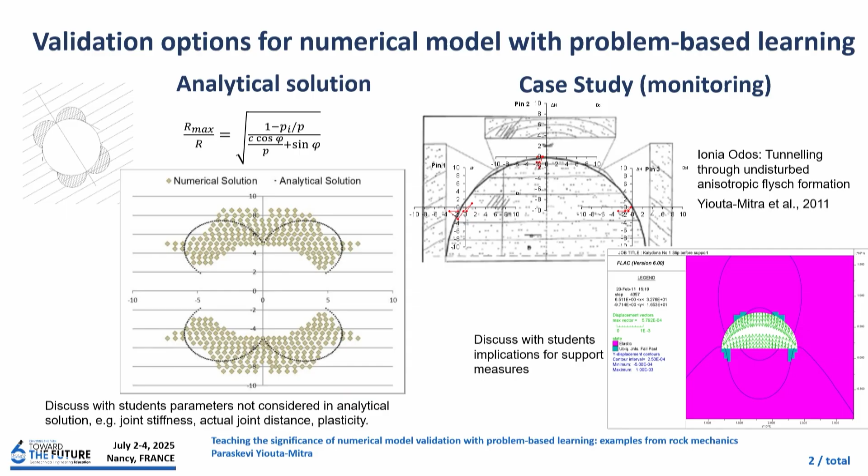The left side is validating your model with an analytical solution, and the right side is validating your case. Of course, this is for teaching with a case study, but if you're the engineer working on the case study, what do you validate your model with?

But anyway, in the teaching context, we have two ways of validating. I guess in the industry context, we have only one way of validating. So you should go and read the paper of my colleague from NTUA.

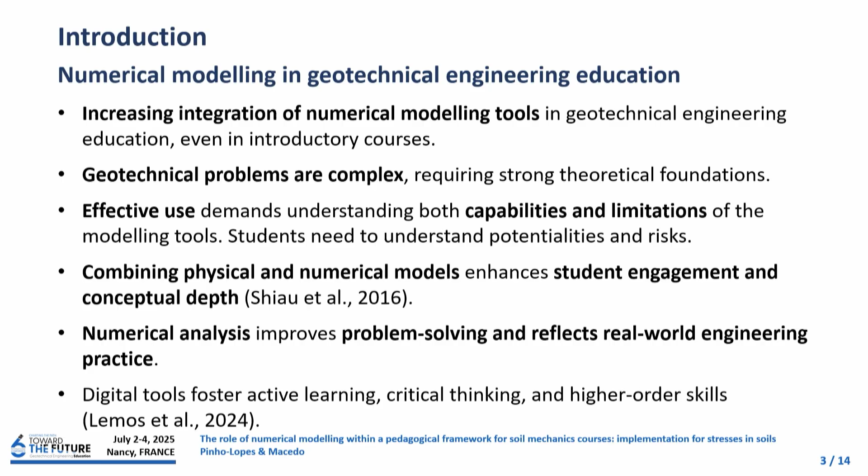While they develop the technical skills that are so important for their future, we know from experience and from the literature that numerical modeling is important, and it's important to introduce these tools even in introductory courses. But geotechnical problems are complex because they require strong theoretical foundations. It's important to first calibrate and validate the models, because they could give what we want, basically. So their effective use demands understanding of the capabilities and limitations of the tools.

Students need to understand the potentialities of the tools and also their risks, like we saw in the talks this morning. So it's also important to show and demonstrate the physical concepts.

Combining physical and numerical models is important because it enhances students' engagement and promotes conceptual depth of those concepts. Numerical analysis improves problem solving and reflects real-world engineering practice. Digital tools foster active learning, critical thinking, and high-order skills that we want to promote in our students.

The context: these are the two programs that we have at the University of Aveiro. In the undergraduate degree, we have basically two courses about soil mechanics—in the first year, a course about engineering geology, and in the master's, a course about foundations and retaining structures.

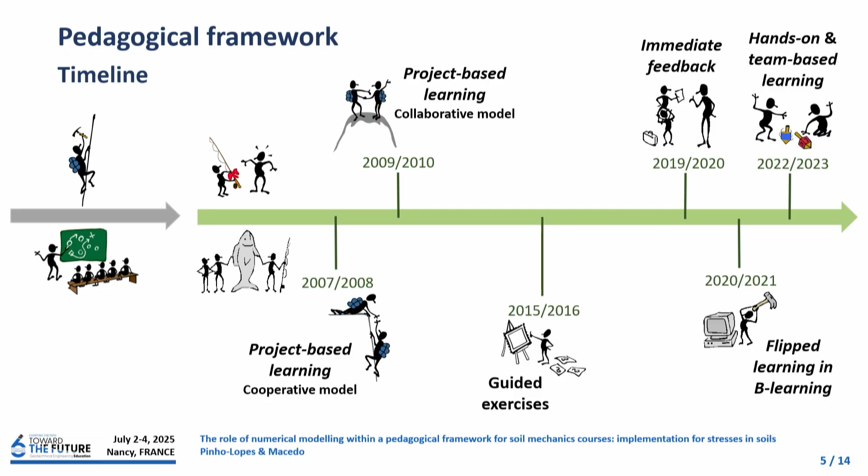We started this path in 2007, 2008, when the Bologna process triggered all the change, and we started to create a pedagogical framework. First implementing project-based learning in a model with a cooperative approach, then we evolved to a collaborative approach. Then we started to create new layers of active learning strategies like guided exercises, immediate feedback, flipped learning during the pandemic, and finally hands-on and team-based learning combined, so experiential learning was also implemented.

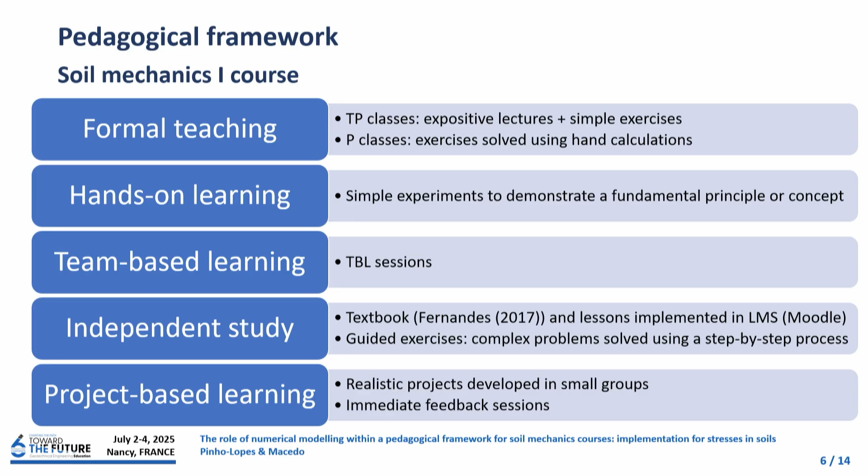So this framework is now stabilized, so we have all these active learning strategies combined. Of course, we have formal teaching, theoretical practical classes with expositive lectures where we do also simple exercises. We have practical classes where the students solve exercises.

And then we have other layers of active learning strategies like hands-on learning where they perform simple experiments. They also do team-based learning, so in some classes we implement this strategy where they collaborate and work in teams to solve quizzes. And then the final fundamental element is the feedback that we provide in big groups. It's important to have independent studies.

So we have, of course, the book of Professor Matos Fernandes that we adopt as a reference guide. We also prepare lessons implemented in our learning management system, Moodle, where the students can hear some of the lessons that we prepared during the pandemic.

And finally, the project-based learning where we implemented the numerical models. So they are challenged to solve realistic projects developed in teams, and in the end they receive immediate feedback.

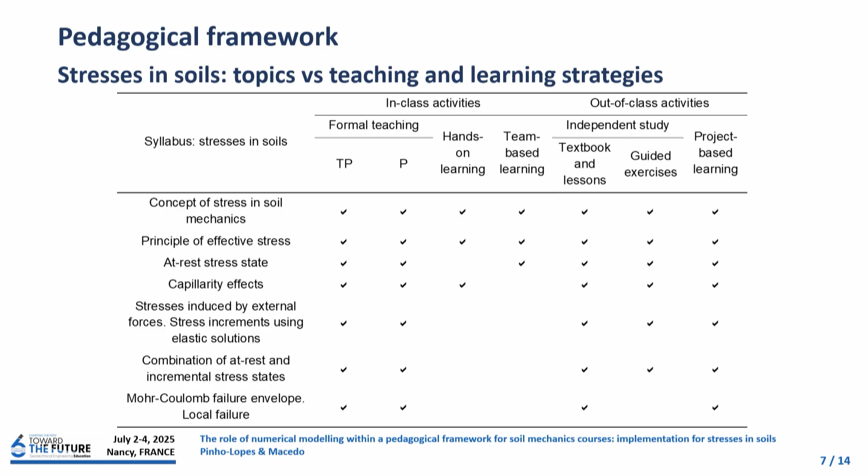So we pick up the topic of stresses in soils, and here we can see how the different strategies are combined and the topics that are studied in this chapter of the syllabus. For each of the topics, we have different strategies where we try to give the students different ways to learn the concepts.

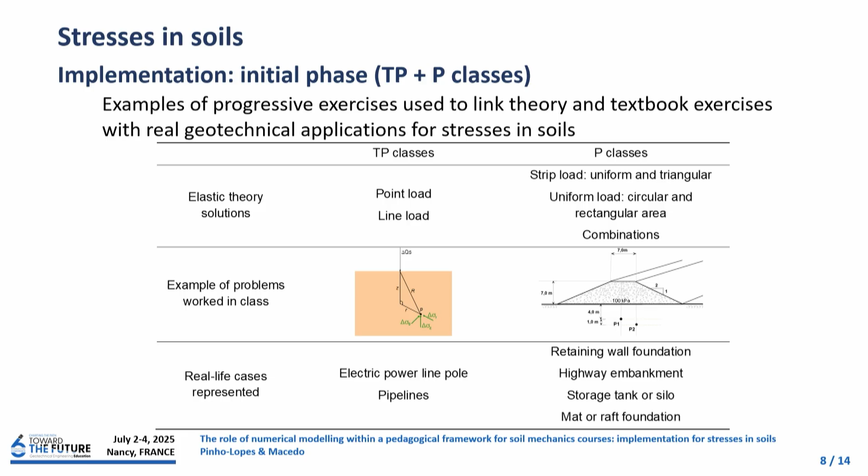For example, we start with the theoretical and practical classes, and there we solve the more simple exercises, then we evolve to more complex ones in practical classes, always giving real-life cases to illustrate how they have application to reality.

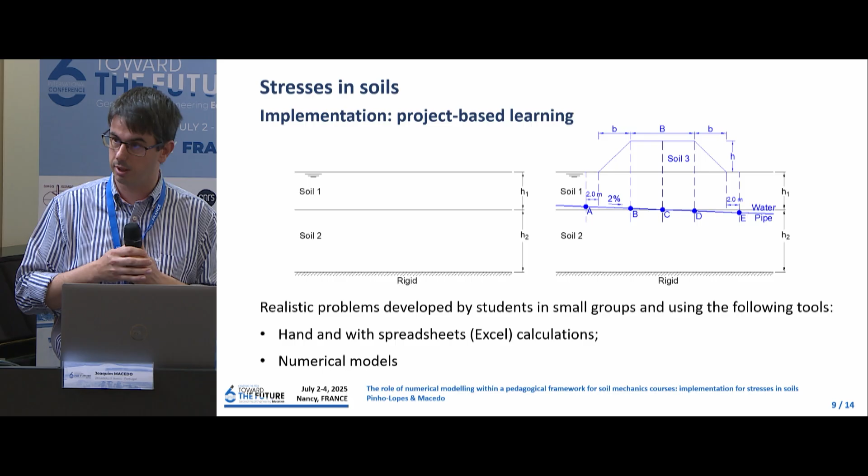In the project-based learning, we usually challenge the students with more complex exercises, where we try to give them two different approaches. One approach where they solve the exercises by hand and using Excel spreadsheets for calculations, and we also introduce numerical models. I'll show you here some results from the models that the students developed.

We also use GeoStudio. Usually they create simple models because that is the idea — they are undergraduate students. We want to start the use of these models, but we also want to make the students aware of the potentialities, but also the risks, and to dismantle some misconceptions that they have. And also to show them, for example, how boundary conditions can influence the results.

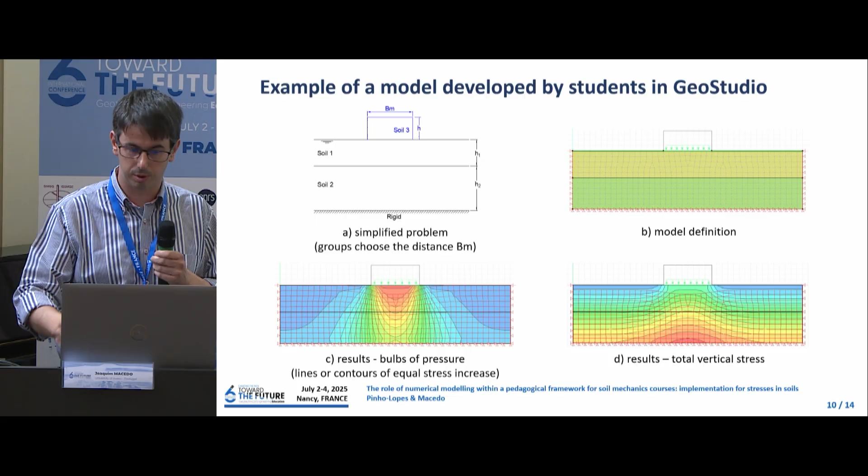So this is an example of a model that the students developed, and here an example of the analysis that they performed. What is basically the big idea? We challenged students to solve the problem, but most important, to compare the results.

So they compared the results obtained by the two ways — calculations and spreadsheets, and also the numerical models. They perform critical analysis, so the idea is to compare the results obtained by the two ways and discuss them. And for that, the feedback sessions are fundamental.

So they discuss the results with us in sessions with one group only. Of course, this is only feasible because we have a small number of students. And in the end, what we want to promote is the development of competences like deep learning, critical thinking, and also digital literacy, because they are using digital tools.

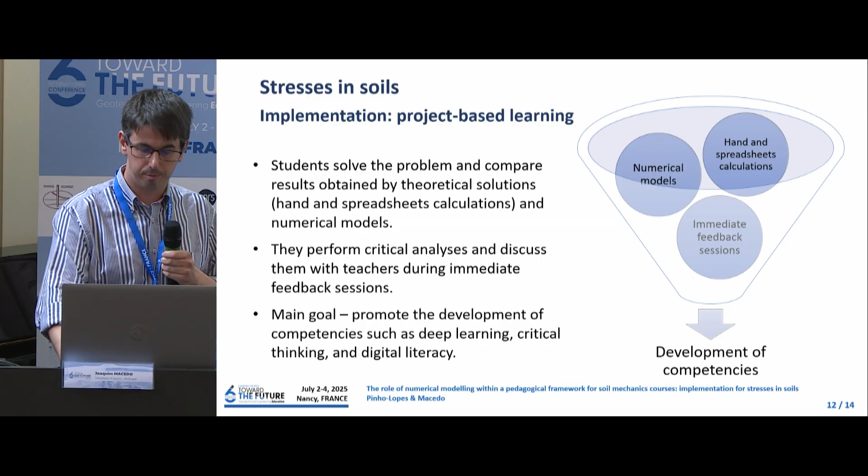So, to respect my time, some final remarks. We implemented numerical modeling successfully in an undergraduate soil mechanics course. We think that all this pedagogical framework fosters active, personalized learning, and in our opinion it's fundamental because the students are all different.

They need to follow different approaches. Some learn better with one approach, others with another. So the combination of all these different approaches is important for their development. Skill development is also important. Applied examples support understanding of complex soil mechanics concepts — this is fundamental to show them how things work.

It's important also to encourage autonomy, to promote deep learning, critical thinking, and digital literacy. We think this pedagogical framework contributes to that and creates an engaging and supportive environment for academic and professional growth, which is fundamental for their future lives. Thank you very much.

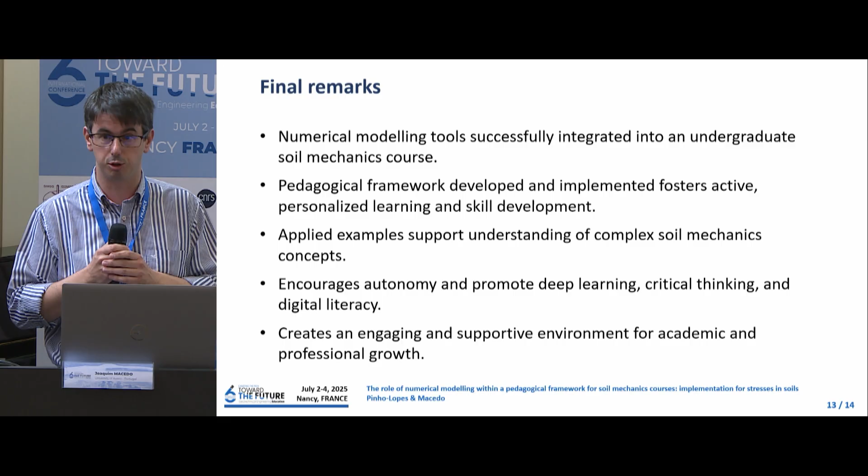Marina: I think it's great that your students have the opportunity to be exposed to numerical modeling in the first course. Do you have later an elective course dedicated to numerical modeling, and if yes, do you teach it, or if someone else teaches it, do you collaborate with them? It's a good question. In our study program, yes, we have one elective course, but it's not working because usually the students don't choose the course.

Now that you have numerical modeling in the introductory course, maybe you'll see a change in this elective. Yeah, we hope so. We wish to see that difference.

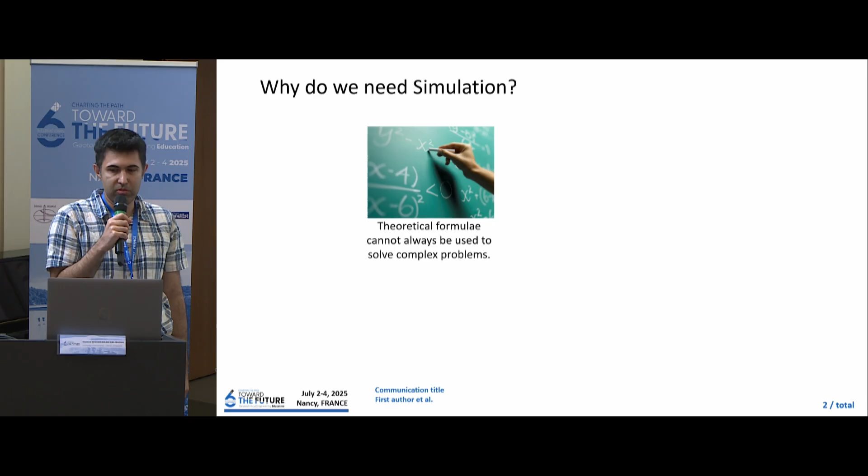Also, there are a lot of physical experiments that we do in soil mechanics. Physical experiments are quite good for student learning, but sometimes they take time to do. Also, in some universities it's expensive. You remember during COVID time, you couldn't get access to the laboratory. So those are the sort of problems we have when we go for a physical experiment. Personally, I believe we need this, and we need to do it along with numerical modeling.

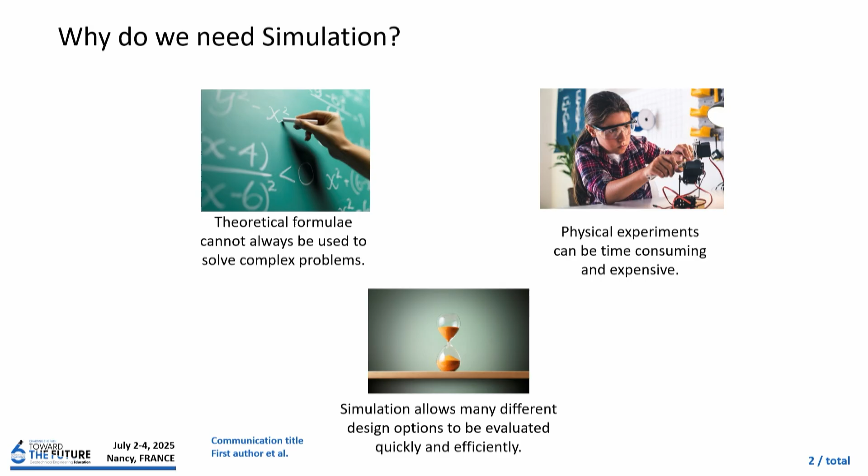And finally, simulation allows many different design options—you cannot instantly change the design by using a physical experiment, but numerical tools give you the opportunity to change parameters and quickly see the result. All of that is embedded in simulation and numerical modeling. Another aspect important for today's presentation, since we are all in geotechnical engineering, is why we need digital tools in geotechnical engineering.

First of all, students will learn many topics based on problem-solving skills. So we need to define the problems, and then they go for finding some solutions. Also, we need to teach students some real civil engineering projects. What we teach usually in civil engineering was some simple task. We give them some good view of simple task.

But in my class, for example, a student asked me a lot of questions about something that I didn't teach them. And I say, okay, forget about this, it's a real situation, you will learn it later. But that later never happens because they need to learn it in the industry, they need to make a lot of mistakes in industry to learn. So giving them some opportunity to try and go finding some errors during the class is important for us.

Also, if we teach students some numerical modeling, and that numerical modeling used by many industry, this means that students have some good equipment when they go to the job market. So when you go to job markets, they said, oh, do you know this software? Can you work with other software like this? And most of the kids, students say, no, we will learn it in the industry because university is usually some theoretical background.

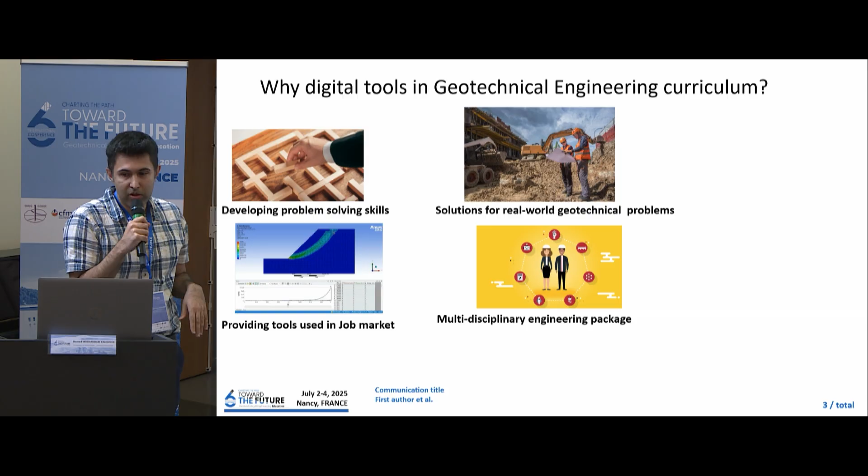And finally, if students learn some software which is multidisciplinary, they have some common language to speak with other people. So if you teach them some software that's used by electrical engineering, mechanical engineering, so they can communicate, they can get some drawing from electrical engineering, they can work on that, and they can implement. So picking a good software is important in my view, and we try to pick a good software for our soil mechanics class. What we did was a case study.

I use a software, I will tell you what software, for modeling of the water flow in the soil. So modeling of the water flow in the soil is a part of geotechnical engineering, and it's part of the soil mechanics. Actually, it's a kind of three-dimensional problem. It's a complex flow in the soil, and it needs some numerical solution.

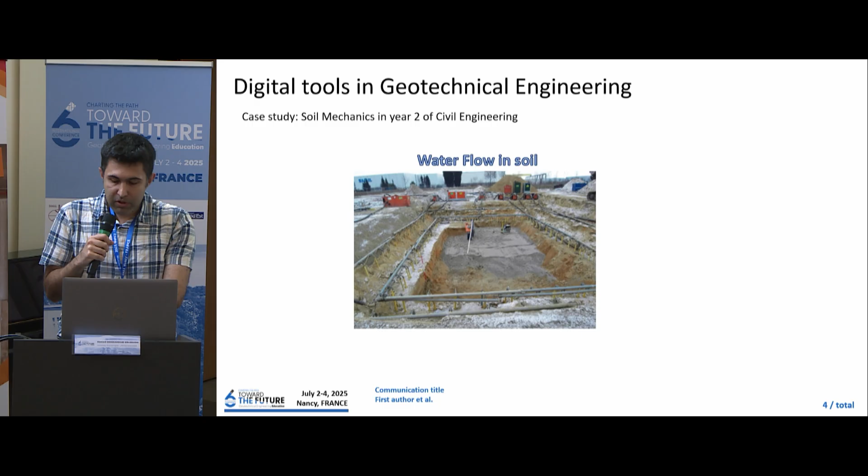Before using a proper numerical software, I'm teaching this course based on some spreadsheet. So students go to the laboratory, it's kind of the computer laboratory. They go for some hand calculation like this, graphical solution. And in the laboratories, they go for some spreadsheet software like Excel for modeling of the flow.

So we did it before any intervention that we had. In 2023, we had that implementation. We had that flow of the water. Students work on the Excel file, but a lot of complaints coming to me. The complaint was, okay, the spreadsheet was nice, but when I make a mistake somewhere, I didn't know what's wrong with my problem.

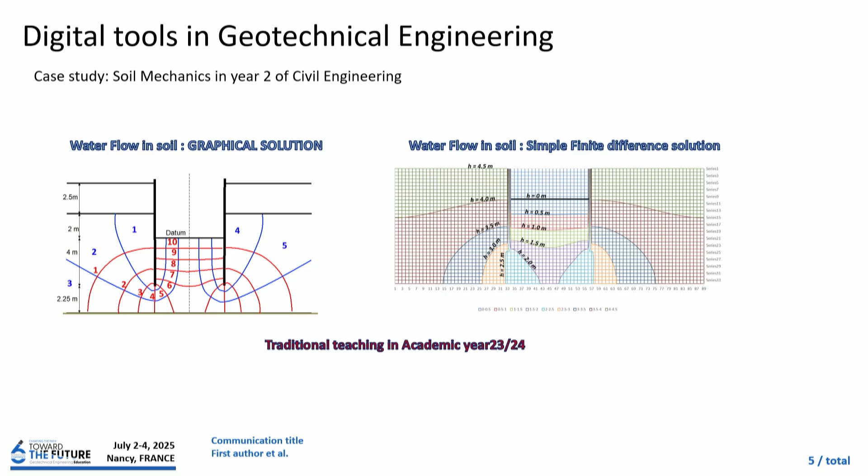Another complaint was, okay, this is for two-dimensional problem. What can I do when I go for three-dimensional problem? So those sort of complaints coming from the students. They learn Excel file quickly because it's easy, but they understand that, okay, this is not enough. For real situation, that's not enough. And I agree with them, this is not enough.

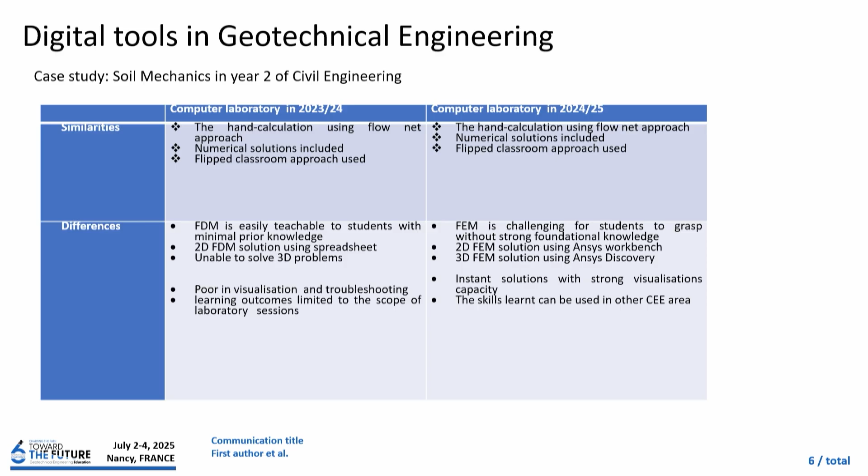So I go for a numerical solution in new year, 2024. So instead of using the finite difference method based on Excel file, we use a proper finite element software. I will give you the name of that, but the key point here is we still have some hand calculation in both years, but we can go for two-dimensional and three-dimensional problems when we are using a proper engineering software. The software that I'm using was ANSYS.

So in Strathclyde, we become partner with ANSYS software. It's not that famous in geotechnical engineering area, so it's used in mechanical engineering. But the good point here is it's a general software, it can be used by other engineering as well. And a skill students learn in ANSYS, they can use it later, and they can communicate it with other people as well.

A good point about ANSYS is the user interface is very good, so you don't need to teach students too much about the finite element. Also, it has the advantage of instant simulation, many finite element software doesn't have. And it's good for teaching some basic concept to students who doesn't know the finite element. So I found it very relevant for my class. It has a fast visualization, and as I mentioned, it's kind of the multidisciplinary package.

The key point about the ANSYS was it's supporting the real-time simulation. Real-time simulation is important because we are dealing with students. Students don't have background knowledge about the finite element method.

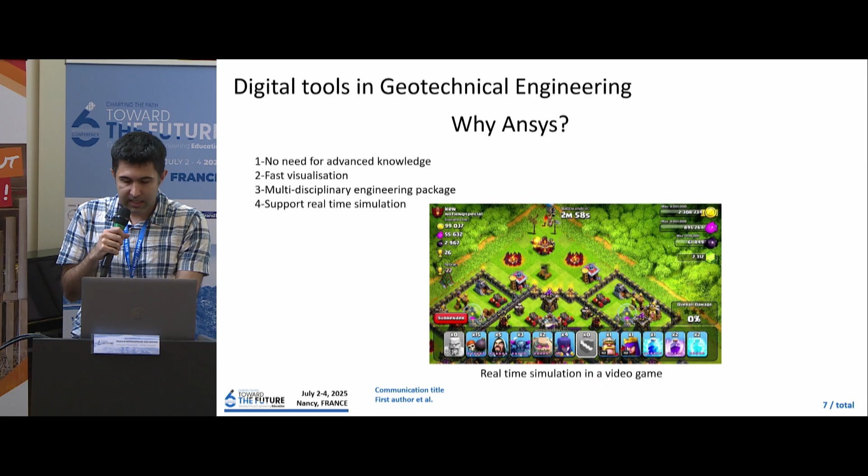So I use ANSYS for my class and for my laboratory. I changed that laboratory based on ANSYS. So instead of using spreadsheet software, I'm using ANSYS.

Students watch a lot of videos in advance, so we created good quality professional videos at Strathclyde. In the class, which was the laboratories, they went there and tried to use ANSYS in the presence of tutors. So they work on their actual projects.

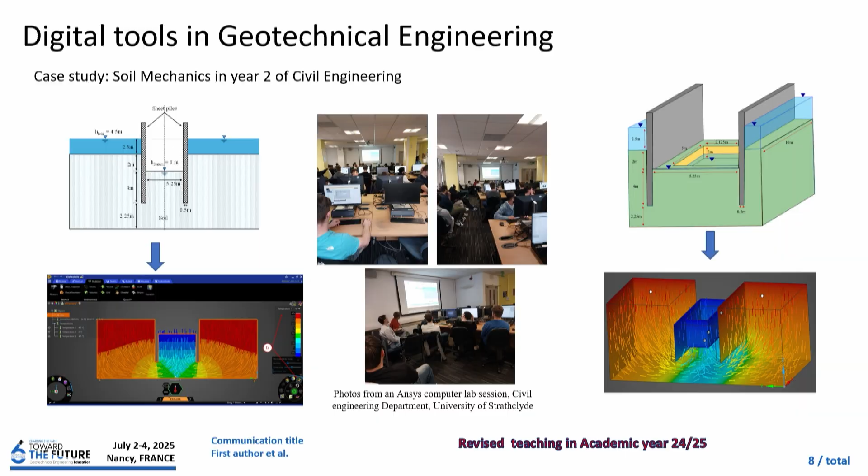A good point here was we had an extra activity for them based on three-dimensional flow. In three-dimensional flows, they cannot use any spreadsheet, but what they did in the laboratory was go for three-dimensional problems. Although this task was optional, many students tried to attempt it. That's a good point for me, because they go for some solution of the real situation.

In terms of students' acceptance, we performed a survey, one done by the university and one done by myself. So I did two types of survey, one in 2023 and one for the current year.

The students say that, okay, you did some numerical simulation, that's fantastic, but we still need some physical laboratory. So that's the students' opinion about my implementations. They said, okay, we need this, numerical modeling is good, but we need to do something else. We need to keep the physical modeling as well.

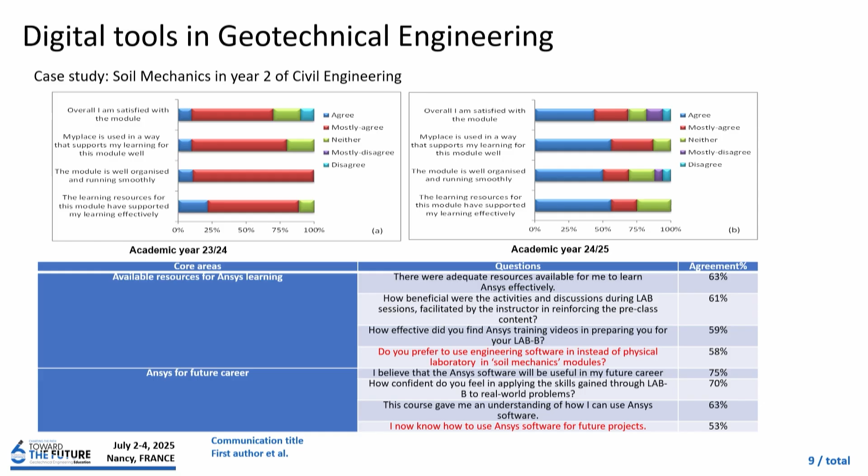Also, they found ANSYS quite useful, but they said that the training we provided was not enough. So we put some videos, but we didn't prepare a student from zero knowledge. We just prepared them for that laboratory, okay? What you need to do is prepare a student from year one, because they need to see and work with some software, and then gradually we can move on to year two, year three, etc.

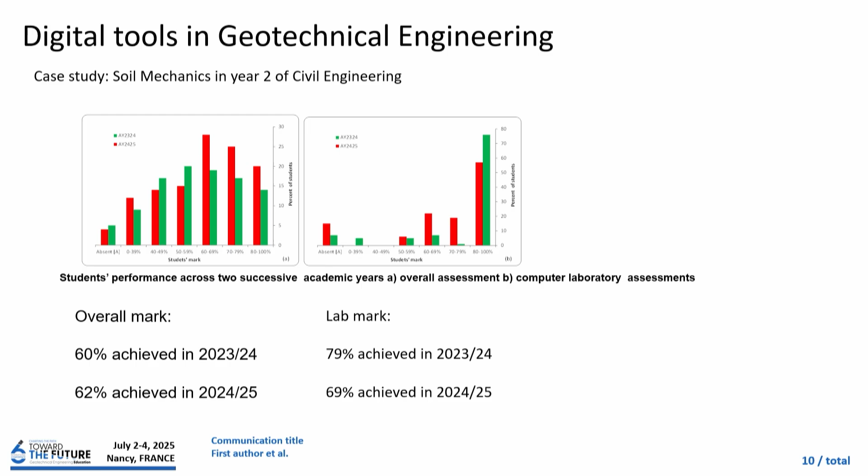I compared their performance in two years, 2023 and 2025. The average of the mark was the same between these two years, but in the new revised laboratory sessions, I got a lower mark. This means that, okay, students like ANSYS, they like numerical simulation, but their mark is low.

I'm thinking about the reason for that. I found some clue for that, and maybe it's because we need proper reporting when we go for the numerical simulation. The students submit some work, but it doesn't make sense. They didn't put legends, they didn't put anything, because they don't know about this.

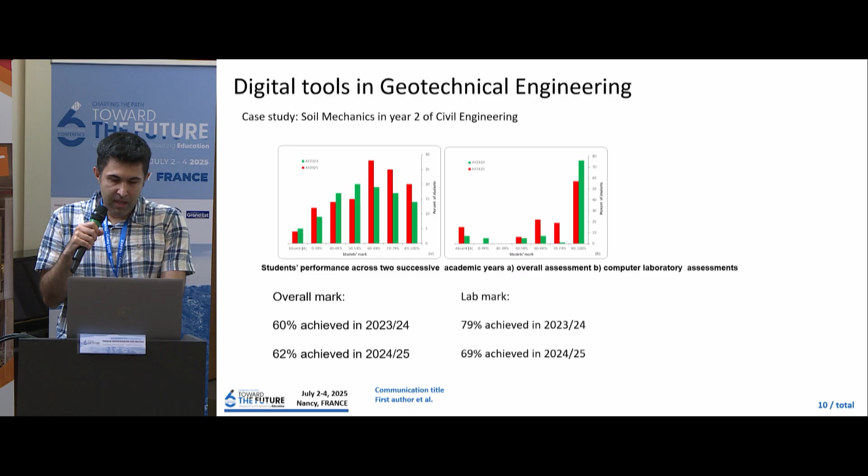So I'm thinking to improve this in my next teaching round. For this case study, I tried to contact ANSYS, and we put that case study on the ANSYS website. This gives all educators the opportunity to go and use this strategy for their class. It's an open source area, you can download that. All the steps are here.

Our plan is to go further than the soil mechanics class, because soil mechanics is the start of geotechnical engineering. We need to prepare students for some advanced classes, like advanced foundation, geotechnical engineering, etc. Okay? So our plan is to produce some content in year 3, year 4, etc.

Out of time, yeah? Okay. So I'm reaching the end, sorry for that.

So we get good satisfaction from students by the new intervention that we did. Students found the ANSYS simulation quite useful for their future job career. Also, they found that the physical laboratory, we should keep it. So we cannot put aside the laboratory, that's not a good strategy.

What I believe is it's good to put some strategy in year 1. Soil mechanics for us is year 2. I'm thinking to put some numerical simulation, some basics of the numerical simulation, in year 1 as well.

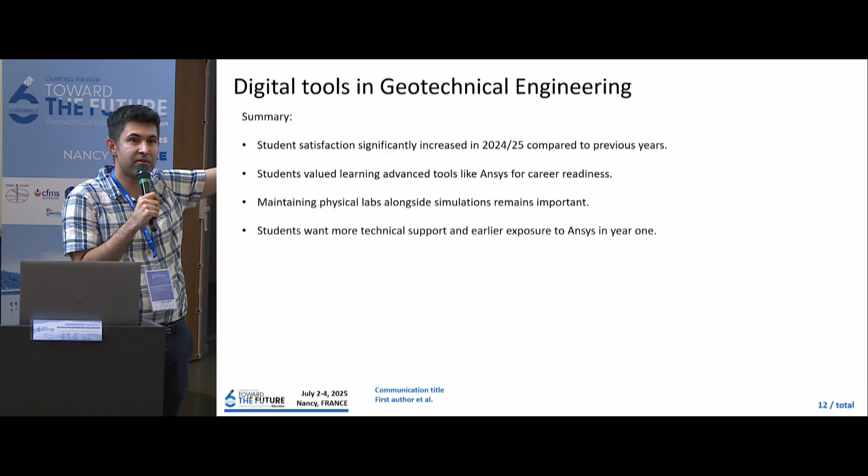Short answer is no, we don't have it. We have something in year 3, but this is year 2 students. They don't know about numerical modeling, finite element modeling at all. But even in year 3, it's only numerical modeling in general, not finite element. What we want to put is something for the master degree, some elective things for master degree. But anyway, I don't think you should expect students to learn finite element in year 1, year 2.

They can see, they can play, they can use it in a way that they are playing video games. So that's my strategy. But they need to know the theories of, for example, flow of water in the soil. So we cannot put it aside. We need a benchmark comparing the numerical solution with that. So we cannot put it aside, in my view.

Can I just reinforce the method? We are not teaching numerical methods. We are using the numerical tool as a virtual laboratory, and we are not downgrading the numerical skill. He is doing the job because he's a numerical person, not me. So the one preparing the tool to be used as a video game by the student has numerical skill and numerical expertise. But that's a virtual laboratory, it's not numerical method. Although we are facilitating later on the approach to numerical method. That is another story.

Thank you, Alessandro. Any other question or comment? No? So we'll move on. Thank you. Thank you, Ahmed.

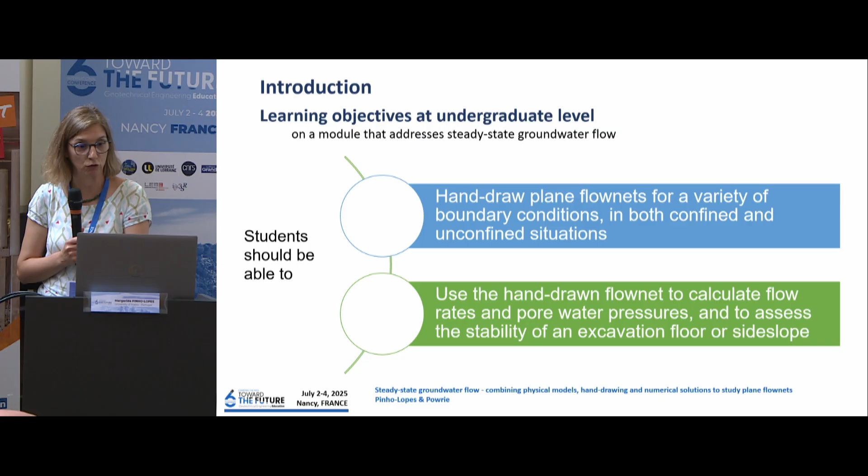Having said this, we need to make sure that they really understand the underlying concepts. So what we've been trying to do is promote deep learning.

For that, we have drawn from our knowledge of different areas: on one hand, the content that we want to teach, but also using pedagogical research literature to inform our teaching. The paper includes some literature review on how to promote effective and deep learning and some strategies that should be used for that, and I won't go into those details now.

We also need to address different learning styles. Not everybody is keen on sitting in a room listening to someone talking for hours. So using a variety of resources and formats can be a way of reaching different students at different moments. We also aim to promote visual literacy, so students are able to communicate but also interpret data that is conveyed in a visual format.

For this, what we have been using, and I think this will resonate with Nicola's talk, is a combination of strategies. We've been using physical models to illustrate the phenomena to students. They then move on to hand-drawing flow nets, and then we use numerical tools, as Francesco said, we're just users, to support all of this, with two variations that I'll explain later on.

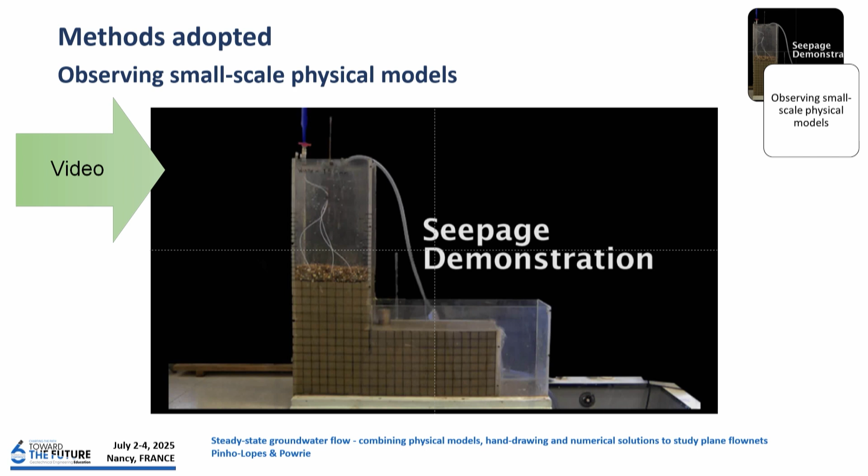In terms of physical models, we've decided to use a video instead of going into the lab because it's simpler, and we can replay the video, pause it. Students can access the video on their own, so they can use it as an element of study to support their work when they're solving exercises, for example.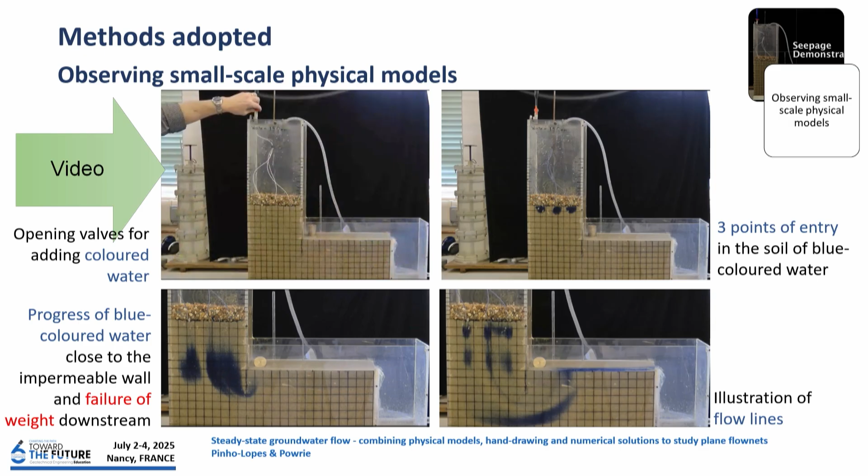In class, I stop the video, I explain, I go back, and I point out different features of the problem.

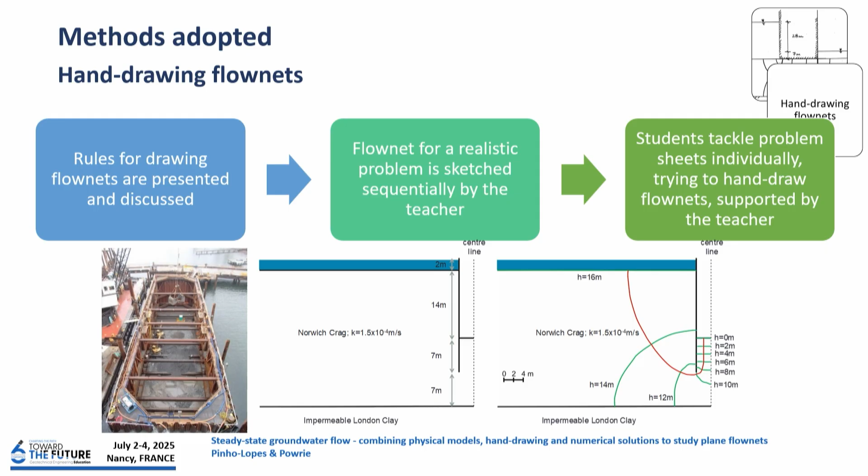Afterwards, and of course we have formal teaching to explain the theory behind it, we move on to the hand-drawing part. We start by presenting the rules for drawing flow nets, graphically solving a simpler 2D problem, and we discuss them in class. Then we build slowly, explaining how all the steps link to the rules, a realistic problem similar to the one in the video, so we can relate to that example.

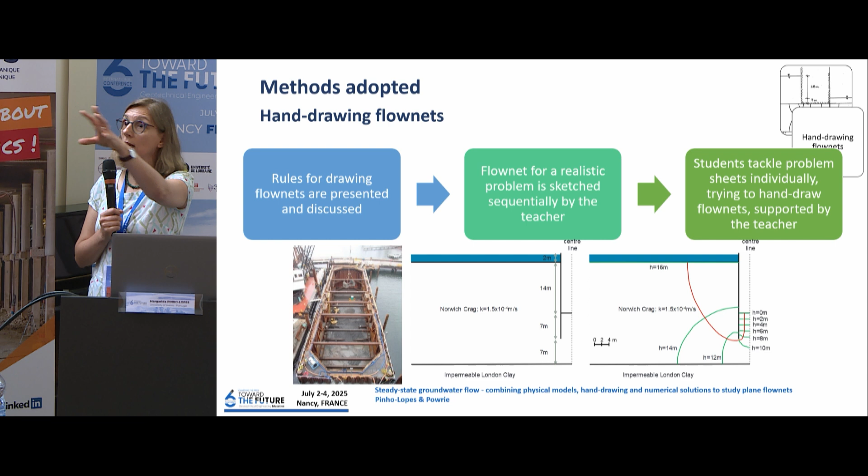Then afterwards, students tackle problems, so they have to hand draw their flow nets in class, even in an environment like this, so they do it on their own, and I walk around helping them to move on. Of course, this is a daunting task. They don't know where to start. So we need to support this in some way.

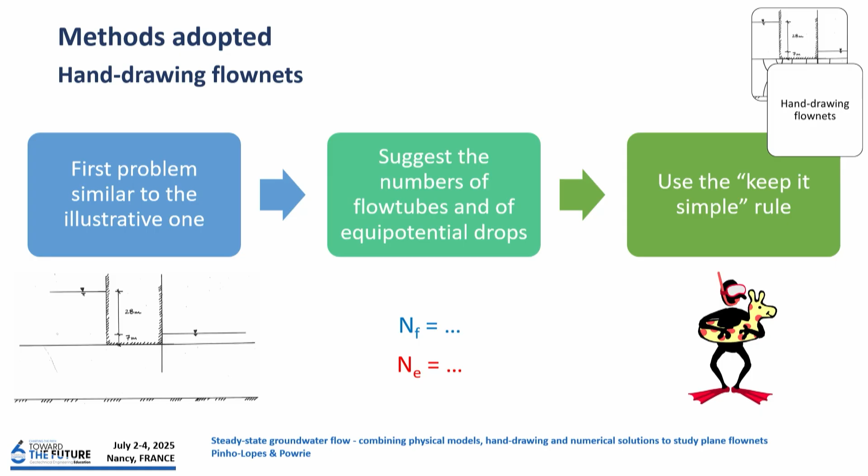So what we do is we choose a first problem that is quite similar to the one we used to illustrate the topic. We often define the number of flow tubes or equipotential drops that they need to get in their drawings, so they have some reference, and we, as Nicolas was saying, reinforce the idea that they should keep it simple, to make their life easier.

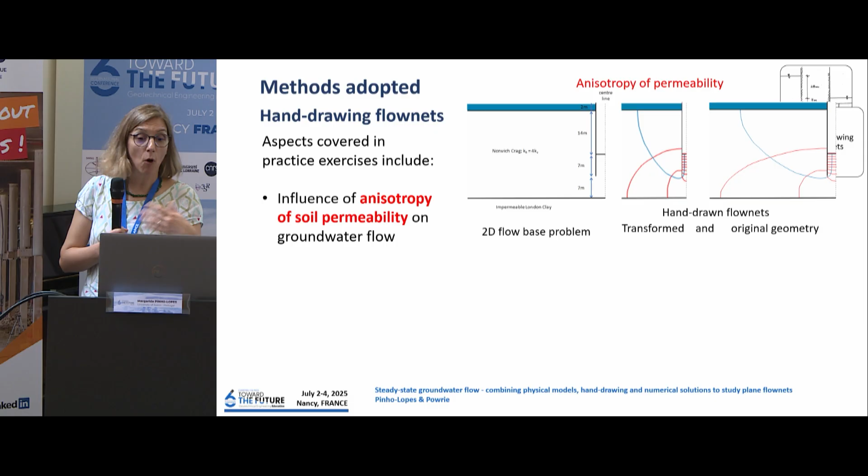This, of course, evolves, and the flow nets that they need to draw become more complicated, and they include, for example, anisotropy of permeability as well, and both confined and unconfined flow nets. But I won't go into those issues.

So then we also use, as I've said before, numerical tools to generate these flow nets, and we do it in two different ways. The first way, done at Southampton, and I'm still doing it, is we use the numerical tools to generate flow nets that we discuss with students, that we show to students. The second approach, done together with the first, we've been developing at University of Aveiro under the project-based learning that Joaquim presented before, where students also use the software to generate flow nets.

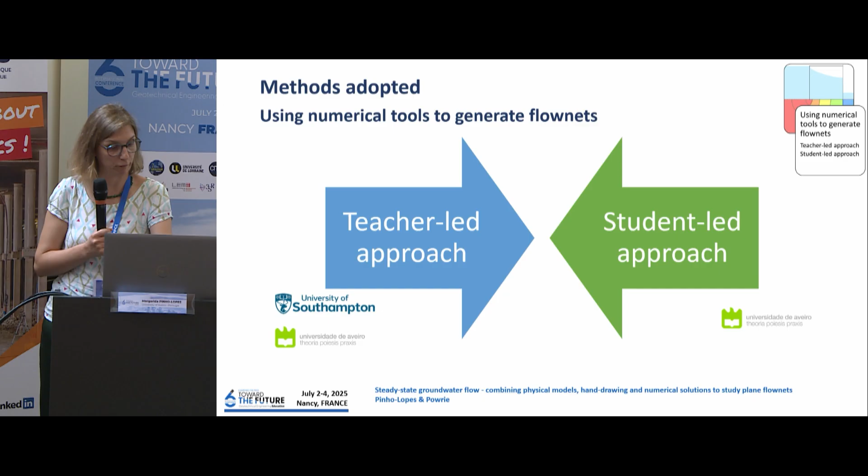Under the teacher-led approach, we want to produce educational material, and that includes generating numerical solutions for the problems students are tackling in class, so they have a reference to compare their hand-drawn flow nets with. But we also use them to promote in-class discussion, something we've been discussing earlier today. What's the impact of boundary conditions on the solution? What if we change the soil permeability, the head loss, the layered profiles, and so on? Whatever we want to discuss with students, we can.

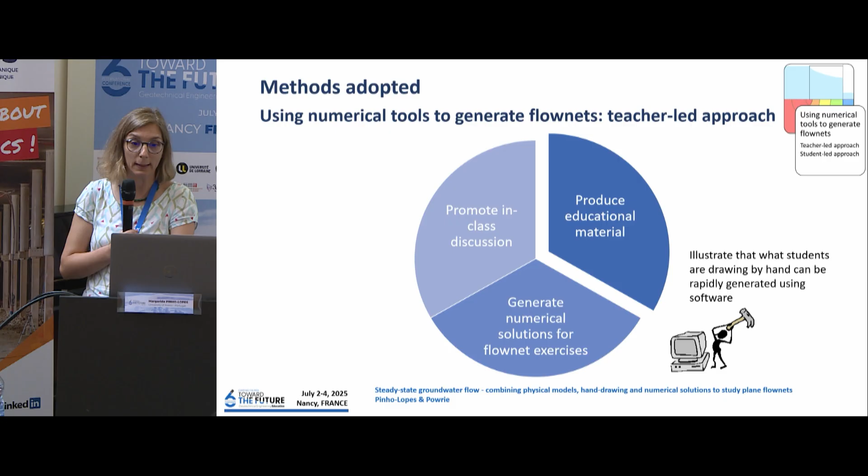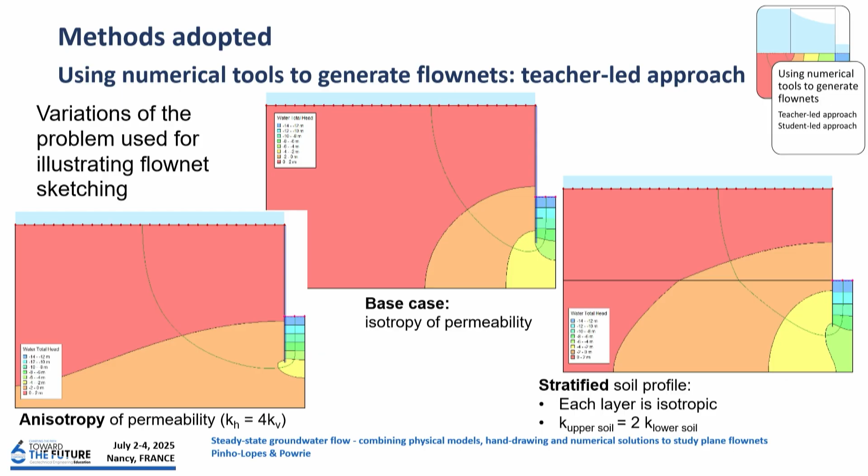And again, just some examples used in class of flow nets generated for anisotropy of permeability of one soil, stratified soil profile, so we can discuss the influence of the difference in permeability of the two soils, for example, in the solution. These are just materials we've generated to support teaching, and some of these have limitations, which we use for in-class discussion as well.

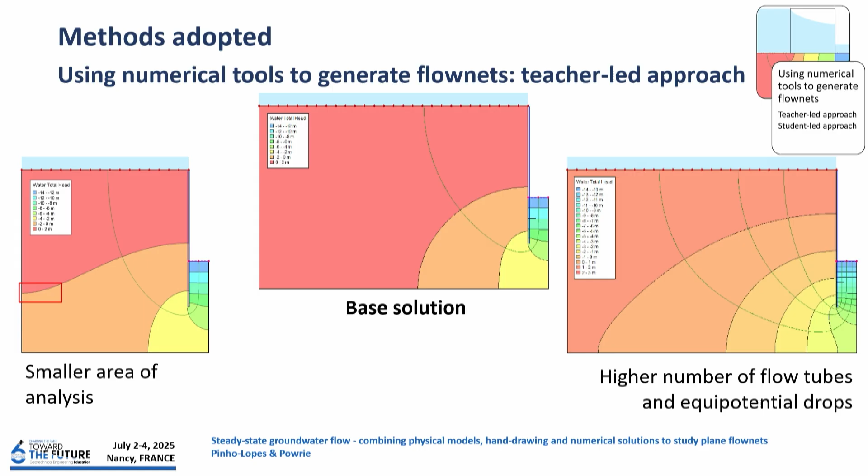For example, as you can see here on the left-hand side, the boundary is too close to the curtain, and that influences the flow net. So all of this is discussed with students. In class, I ask them to try and explain the differences so they become aware of those.

And of course, we generate different versions of the flow nets. I think I haven't mentioned which tool I use. I use GeoStudio, as Francesca mentioned, because I think it's quite user-friendly for us and for students to use.

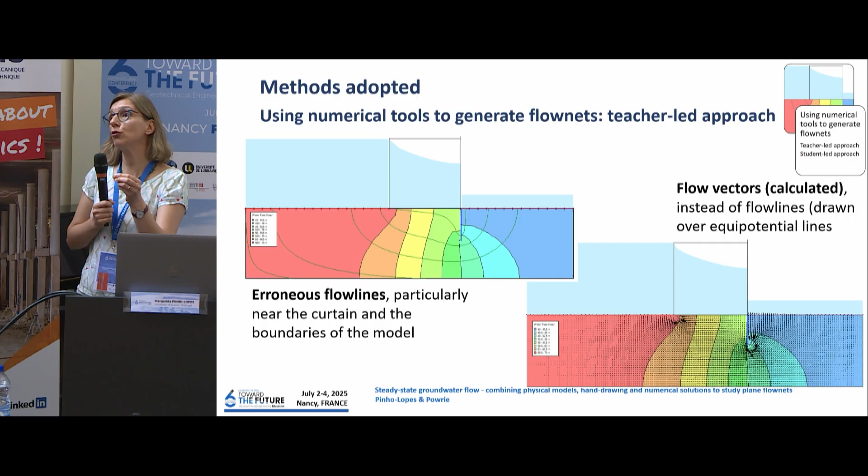But GeoStudio doesn't calculate flow lines, it calculates flow vectors. So those flow lines are drawn on top of the equipotential lines, and that can create problems. We discuss that in class, and I often do exercises of the type spot the error, okay? This is an example of that. So we point out that flow vectors need to be looked at when using GeoStudio rather than flow lines.

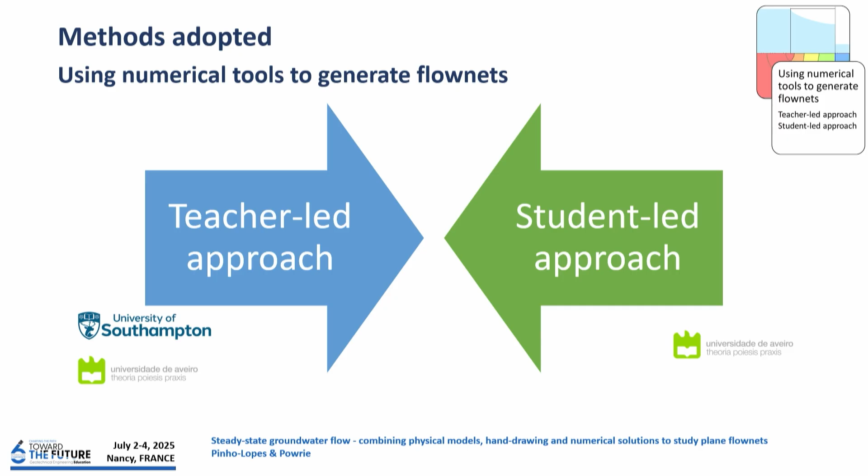So for the student-led approach, as I've said, and I have just a little bit of time, we ask students in Aveiro to tackle team projects. These team projects are different depending on the topic we are referring to, but they may involve lab work, hand calculations or with spreadsheets and using software.

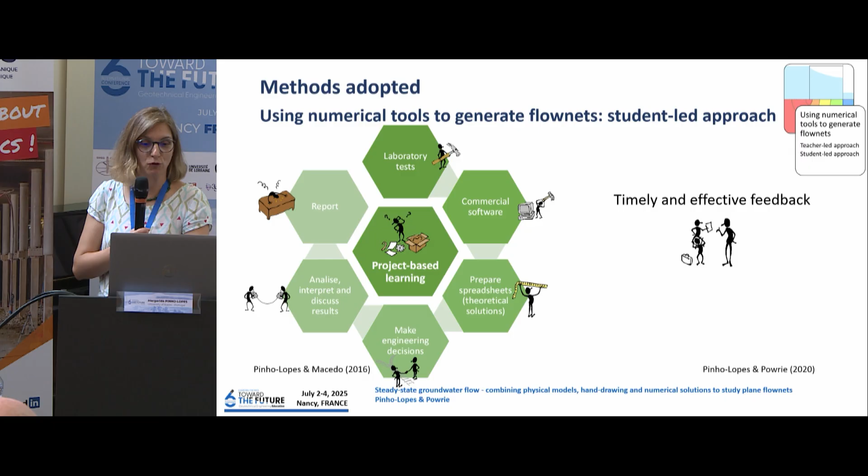But the key part, as I've said before, is at the end to discuss the outputs with the students, to correct mistakes or demystify misconceptions. All of this work, of course, has to be adequately supported, so we use resources from the software provider.

But we've also produced video tutorials fiddling with GeoStudio, generating the problem in different ways, changing the geometry, the boundary conditions, whatever you want, for students to be aware of the impact on the results. And about the meshing in GeoStudio, we can only change the size of the element, and that is discussed as well with students.

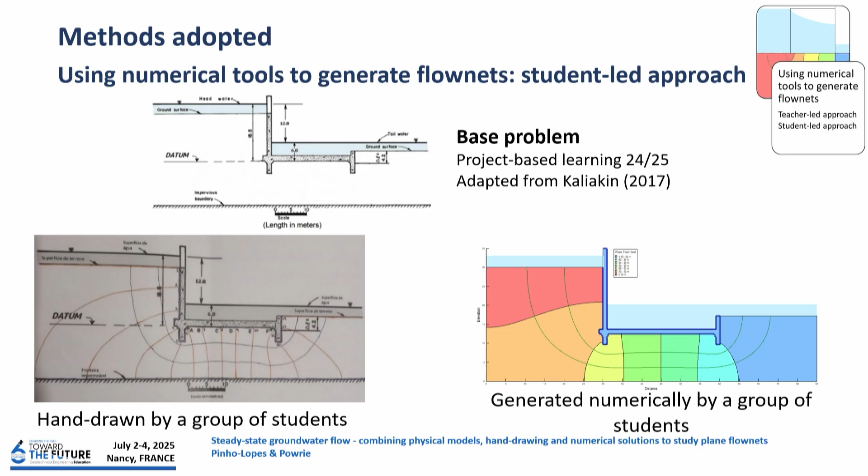So these are just some examples of students' output, hand-drawn and generated with the software from this academic year. And I'm out of time. I would just say that...

We've tried to use different strategies, and we think this is working. I think we are able to engage students, but at the same time, we foster critical thinking. And I think that's the key part of it.

So I would say we can use numerical tools or have students with no background in finite element methods using numerical tools as long as we scaffold that process and support them into their learning. And I had some more things, but I'll go over that.

So as a conclusion, William and I recommend using this variety of tools to support learning. Thank you.

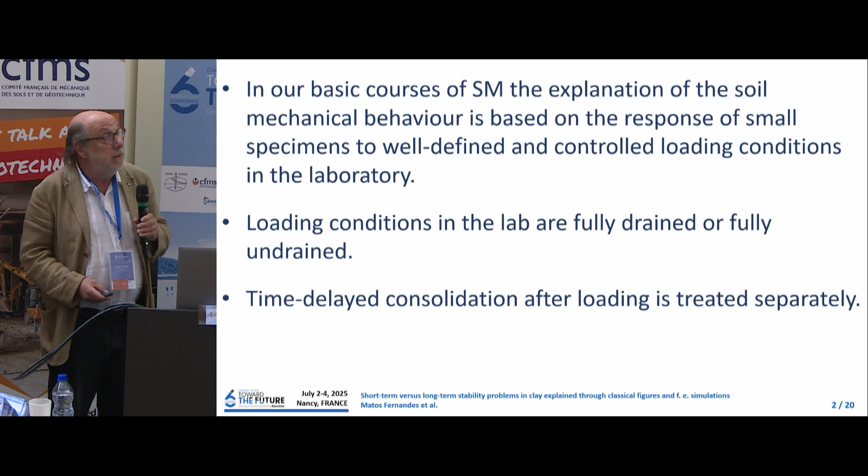In our basic courses of soil mechanics, the explanation of soil mechanical behavior is based on the response of small specimens to well-defined and controlled loading conditions in the laboratory. The loading conditions in the lab are fully drained or fully undrained, and the time-delayed consolidation after loading is treated separately.

For those reasons, a closure class presenting real field loading examples may be highly formative - I'm speaking about the last class of the course. For that closure class, the paper proposes the discussion of two geotechnical works: the construction of an embankment on soft clay and the excavation of a sloped cut in clay.

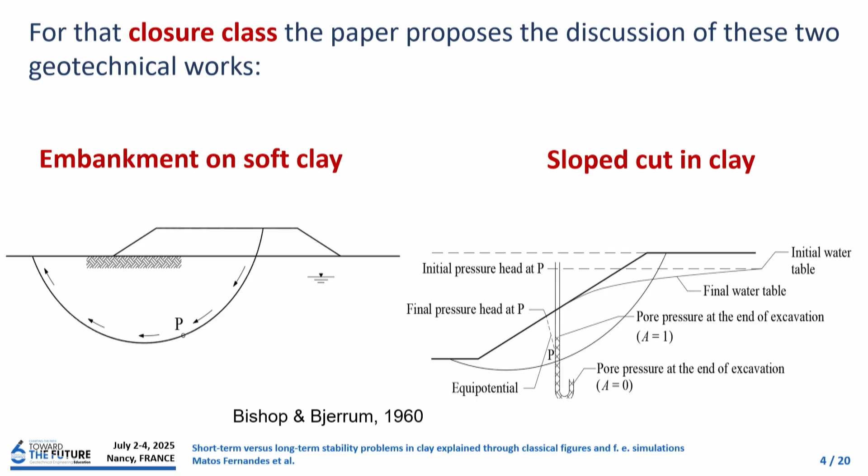These two very common and very relevant geotechnical works are splendidly explained in two classical figures developed by Bishop and Bjerrum, which you probably know very well. This is the figure for embankment construction. We see the embankment and the potential rotational failure.

The second graph shows the rising of the height of the embankment over time and the rising of the average shear stress at a generic point P of the foundation ground. The increment of surface loading leads to a rise in pore pressure. It induces an excess pore pressure over time that reaches its maximum at the end of construction, and after that we have a consolidation process where the pore pressure returns to equilibrium.

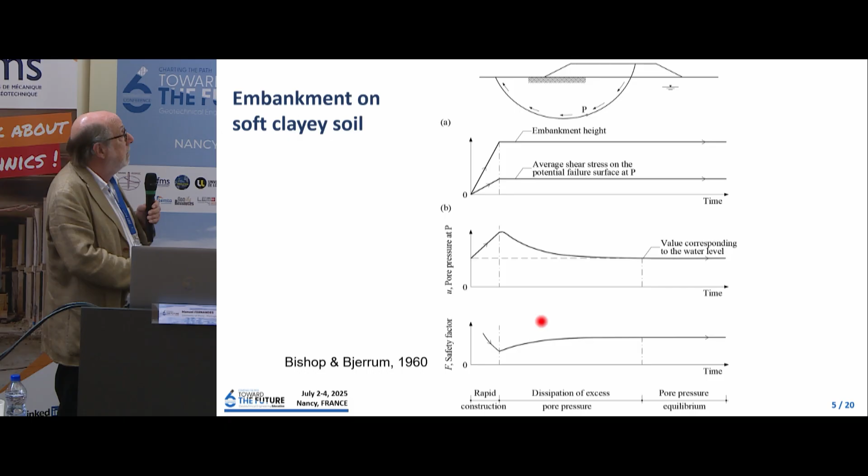The last graph is very important. It shows the safety factor with regard to a rotational failure, and we see that the safety factor diminishes during construction, reaching its minimum at the end of construction, and increases over time with the consolidation process.

The next figure is the twin figure for the cutting. We see here the evolution of pore pressure. In this case we have a negative excess pore pressure. The maximum negative pore pressure is reached at the end of construction, and after that we have a dissipation of this negative excess pore pressure.

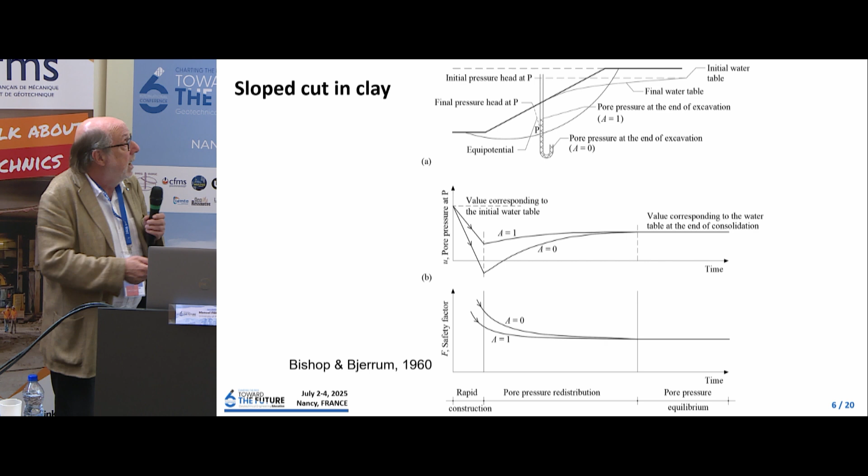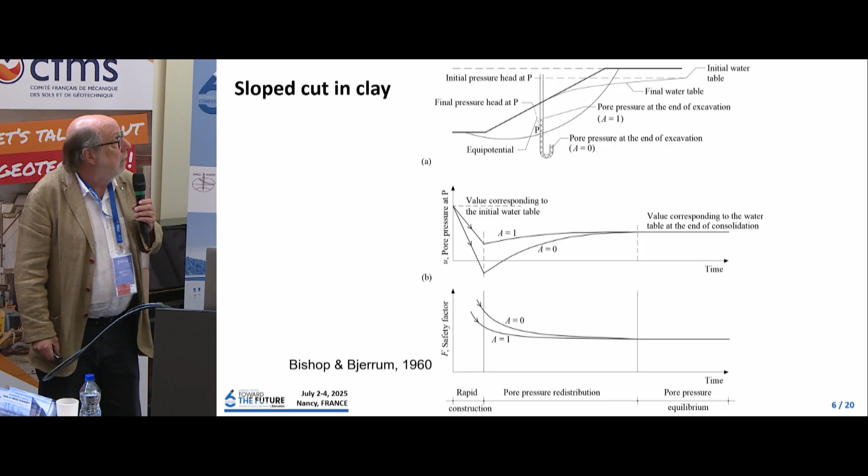The pore pressure increases over time, leading to a reduction of the mean effective stress, a reduction of shear strength, and a progressive reduction of the safety factor compared to the values at the end of construction. Here we see two curves for two values of the pore pressure parameter A. A equal to 0 may correspond to an over-consolidated soil, and A equal to 1 to a normally consolidated soil.

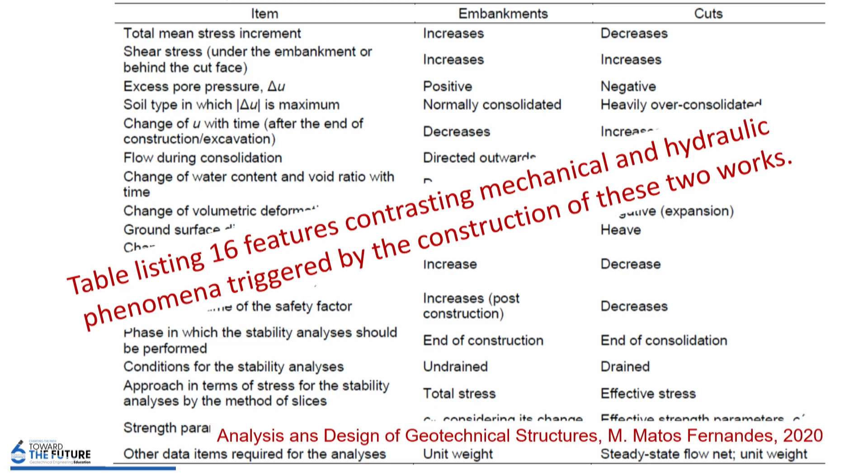In my textbook I introduced a table listing 16 features comparing mechanical and hydraulic phenomena triggered by the construction of these two works - just a few examples. For instance, total mean stress increment obviously increases in the embankment and decreases in the cut. Excess pore pressure is positive for the embankment and negative for the cut.

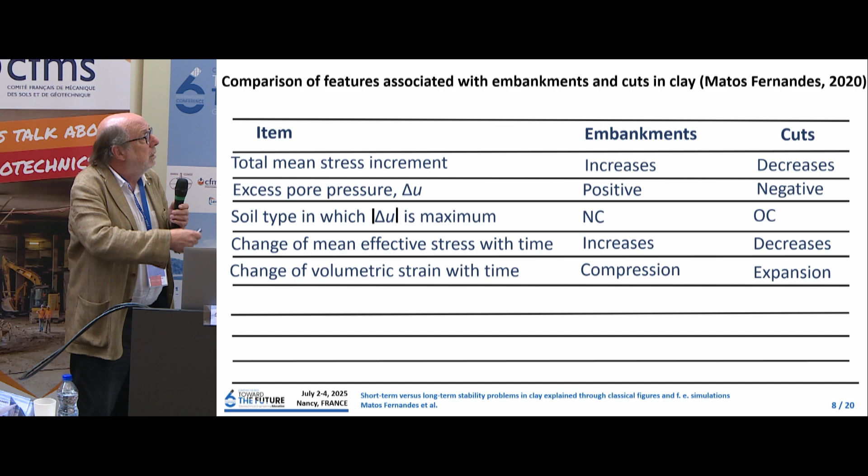Soil type in which the excess pore pressure is maximum - normally consolidated or over-consolidated - and other features. These types of features are related to what happens at a given point of the ground mass. But other features discuss, for example, the change of the safety factor with time: it increases for the embankment and decreases for the cut. It's difficult to control the pointer, but there's also the stage appropriate for stability analysis.

The stability analysis should be performed for the end of construction in the embankments and for the end of consolidation in the cuts, and these are the conditions for the stability analysis.

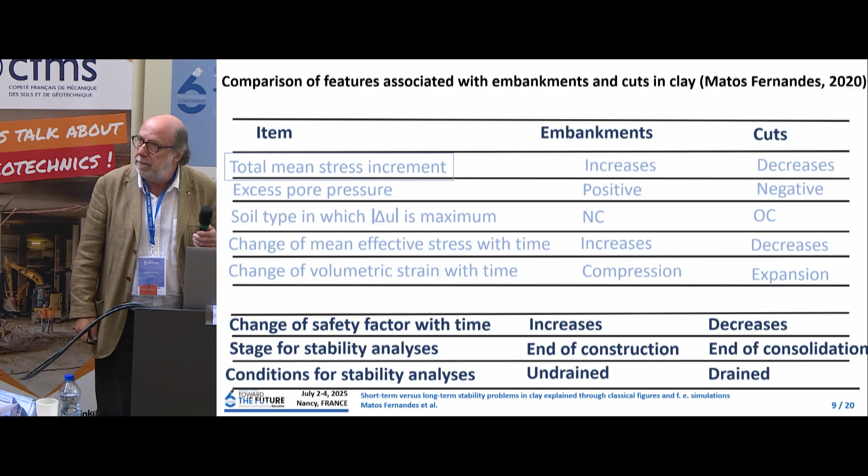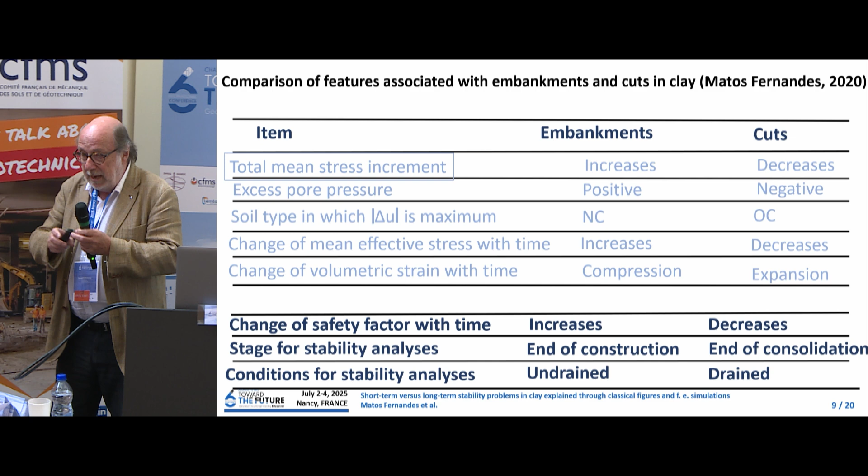According to my experience, it's extremely motivating to fill those cells of the table in class, discussing aspect by aspect with the students and asking for their collaboration. It's a very successful class to discuss this with students aspect by aspect. This prepares and creates a positive expectation for the next discipline on geotechnical engineering, when we discuss geotechnical structures and not anymore a small specimen in the lab under very simplified and controlled loading conditions.

The second part of our paper is a finite element simulation of the construction of an embankment on a soft clay. This was done using a finite element code developed by José Borges, the second author of the paper.

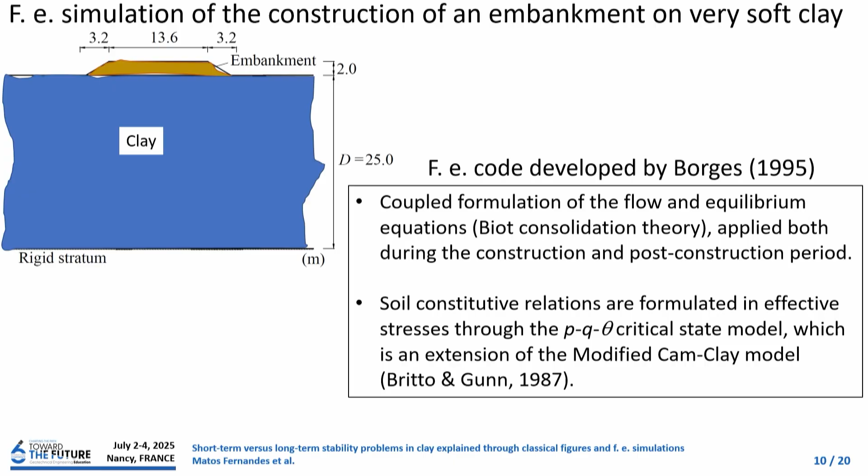The finite element code has a coupled formulation of the flow and equilibrium conditions, according to the consolidation theory, applied both during construction and the post-construction period. So it can treat the rapid loading, and after that the consolidation process, combining flow and equilibrium equations. The soil constitutive relations are formulated in effective stresses through the PQ theta critical state model, which is an extension of the modified Cam-Clay model.

We have here our embankment. It's a small embankment because the clay is very soft. It's a Chicago clay, and the parameters that we used for the PQ theta model have been extracted from a study of Finno et al.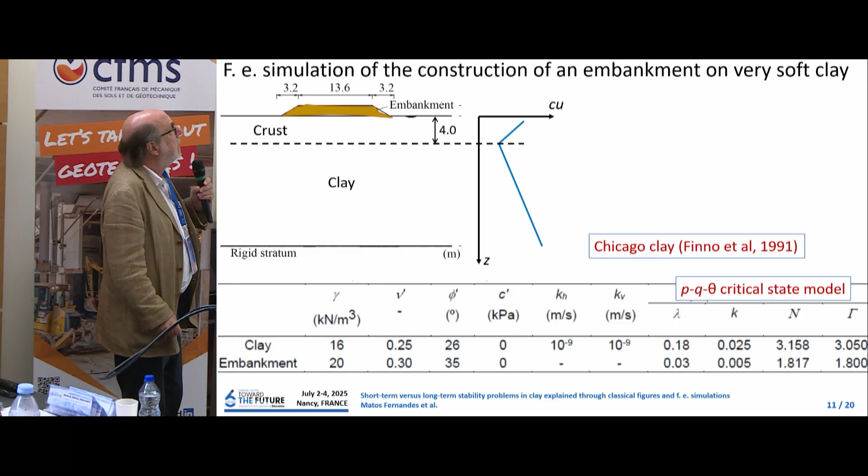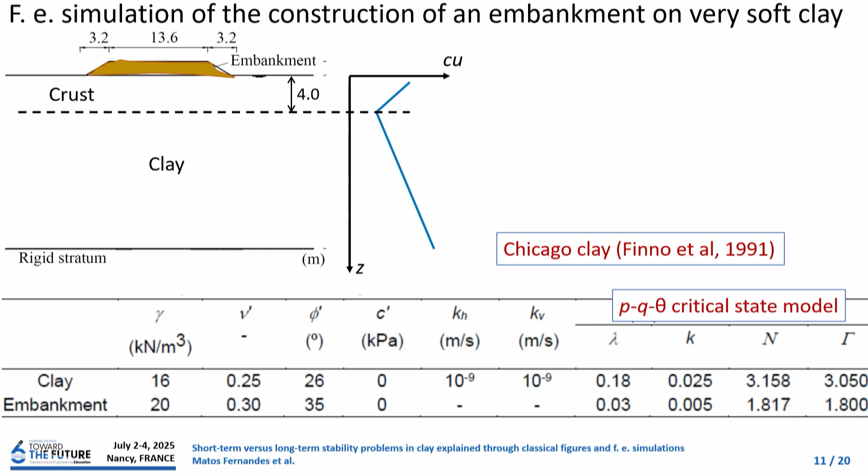The thickness of the clay deposit is 25 meters. We have a rigid and impermeable stratum, a superficial crust 4 meters thick, and here the typical evolution in depth of the undrained shear strength. So when we use the finite element method, we have an enormous amount of results to treat.

I will just show 6 slides with the results. This shows the vertical displacements of the ground surface for the end of construction and the end of consolidation.

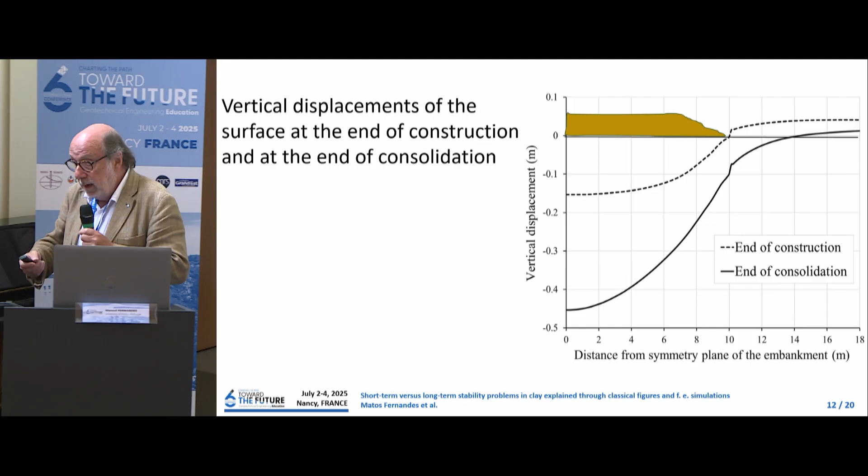We see the typical upward vertical displacements at the side of the embankment, because at the end of construction, volumetric strains are practically null, so the upward lateral displacements must compensate the immediate settlement underneath the embankment. Globally, the volumetric strain of the ground mass was zero at the end of construction.

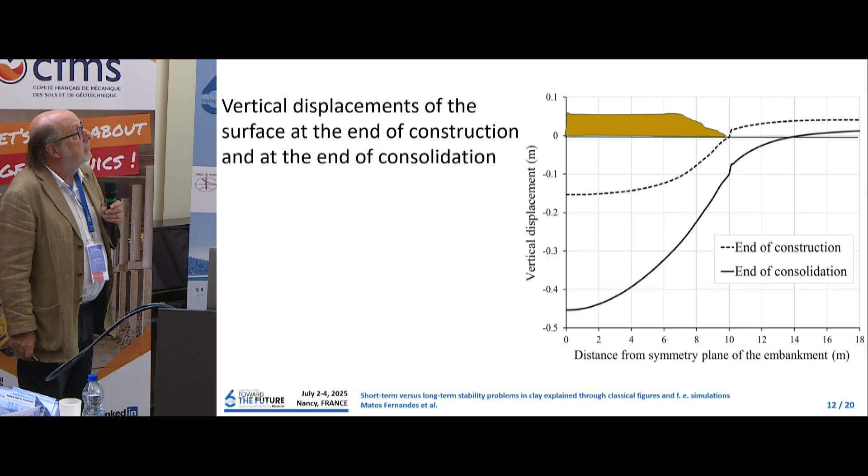And we can observe after that, at the end of consolidation, further settlement. We see here that we have in the center of the embankment an immediate settlement of 15 centimeters, more or less, and a further 30 centimeters during the consolidation.

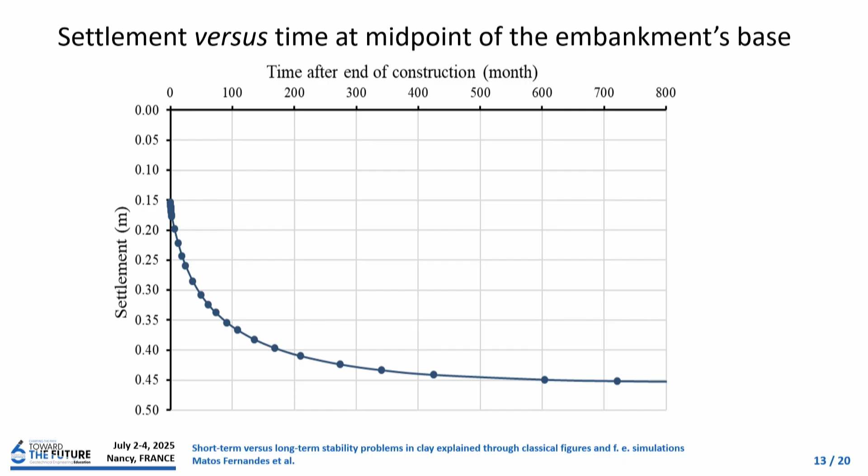Here is the change in time of the settlement of the midpoint of the embankment base. We see here the 15 centimeters of immediate settlement, and the time-delayed consolidation settlement until reaching the maximum value of 45 centimeters.

This is an interesting result. I hope that I have still some time. No?

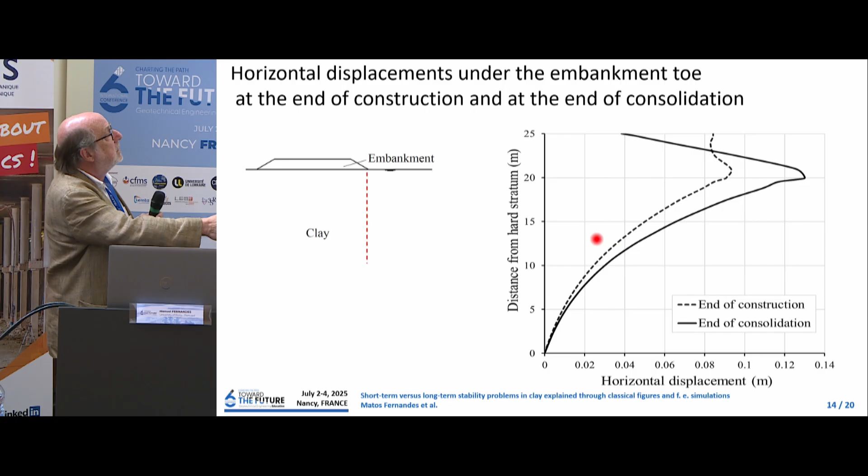This shows us the horizontal displacements under the toe of the embankment. See the red line. It's interesting to observe that the horizontal displacements during consolidation are very small, because in this scale, each square corresponds to 2 centimeters. So we can observe that during consolidation the horizontal displacements are very small, which is a well-known result, and permits us to calculate the consolidation settlements using the parameters from the oedometer test, where we have no lateral deformations.

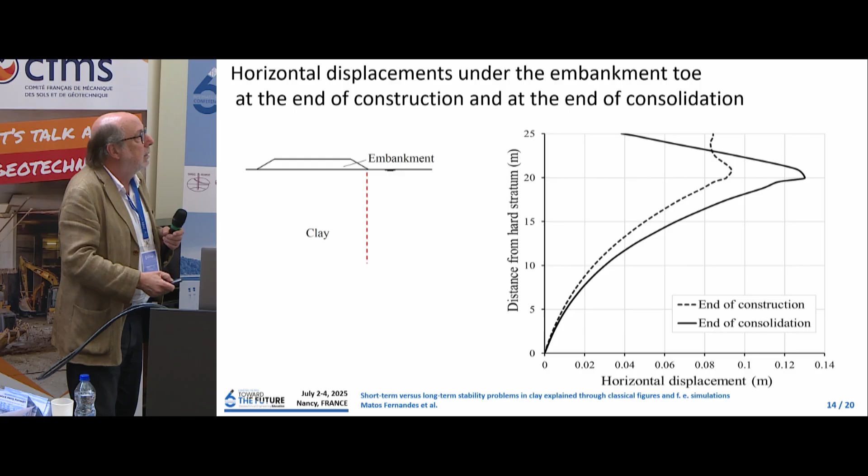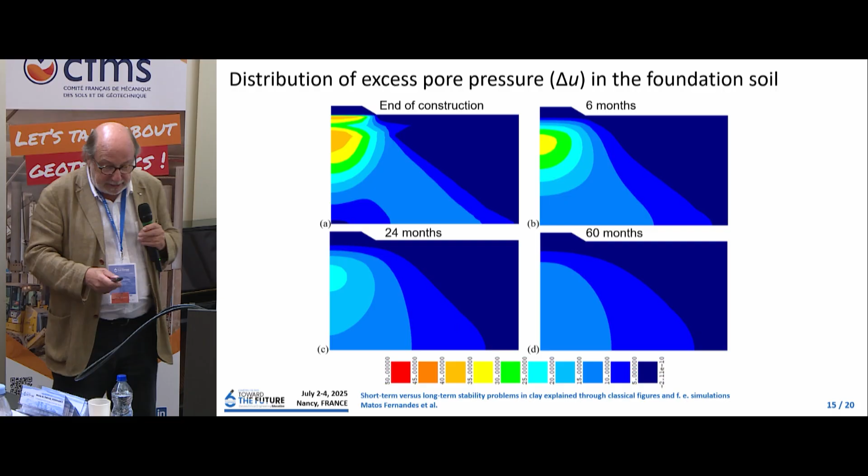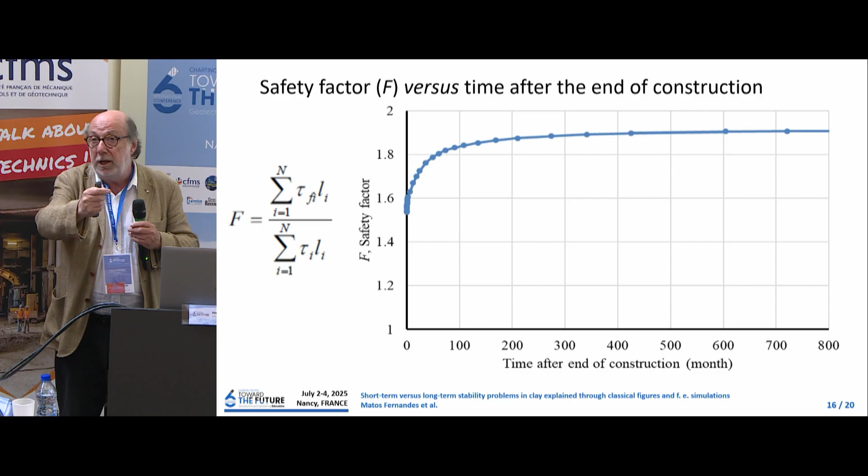Here we have the safety factor over time, specifically the safety factor at the end of construction and its increase over time. The safety factor is calculated by the slice method, considering for each point of the failure surface the normal, shear, and pore pressure stresses provided by the finite element calculations, in each finite element intersected by the slip surface.

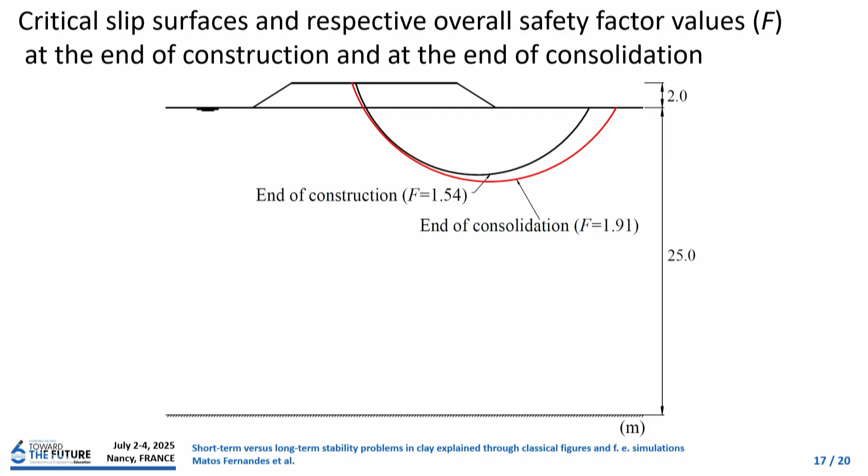So we can observe the increase of the safety factor, and this is the last slide of the results. We can see the critical slip surfaces, that is, the slip surfaces with minimum safety factor for the end of construction and the end of consolidation. And we see that, as we could expect, the critical slip surfaces are not the same—they vary with time.

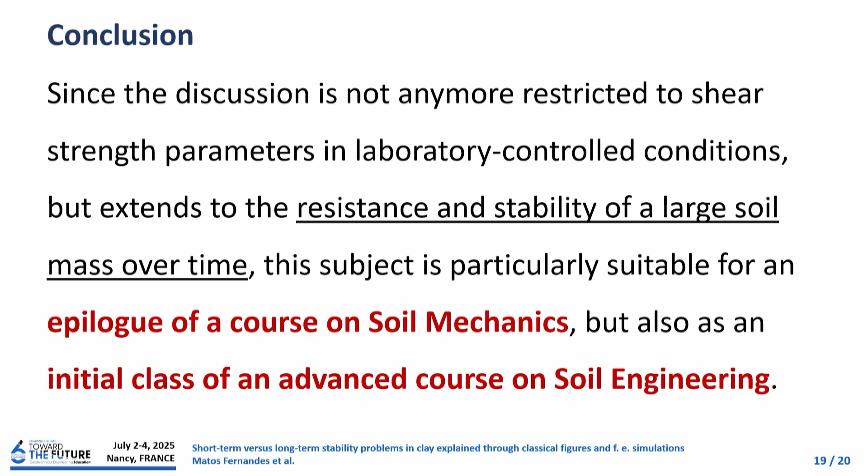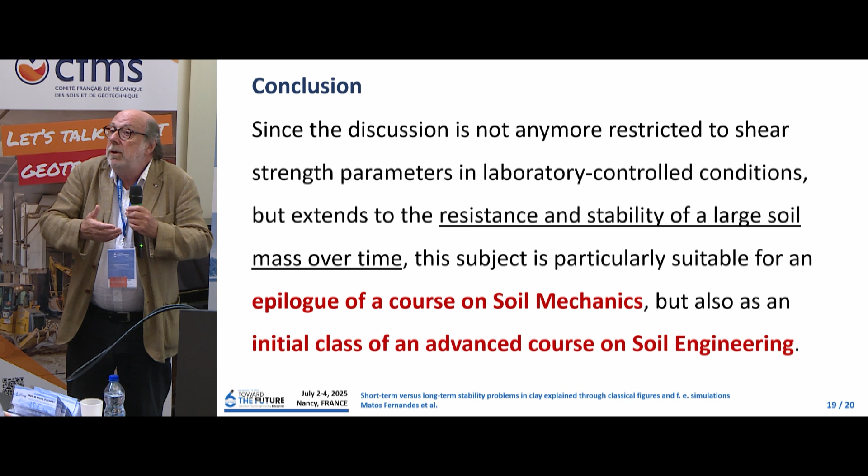I will skip this slide, and as a conclusion, I would say that since the discussion, when considering these two geotechnical works, the embankment on soft clay and the cut excavated in clay, is not anymore restricted to shear strength parameters in lab controlled conditions, but extends to the resistance and stability of a large soil mass over time, this subject is particularly suitable for an epilogue of a course on soil mechanics, but also as an initial class of an advanced course on soil engineering or geotechnical engineering. Obviously, if I am speaking of the last class of the basic course, the discussion will be focused on the classical figures and on the table.

In the initial class of an advanced course on soil engineering, in a master course, I would say that the discussion might be based on the results of the finite element computations. Okay, thank you for your attention, and my apologies.

Thank you. Any questions or comments? So just a question on that.

The case study you presented, is it just a predictive exercise? You don't have data to compare the calculations to from performance of an actual embankment? No, it is not an actual embankment. It is an actual clay mass, but our embankment was an academic example. So we have no results to compare with observation. Okay, so we need case studies from industry to do that.

Yes? Any other question or comment?